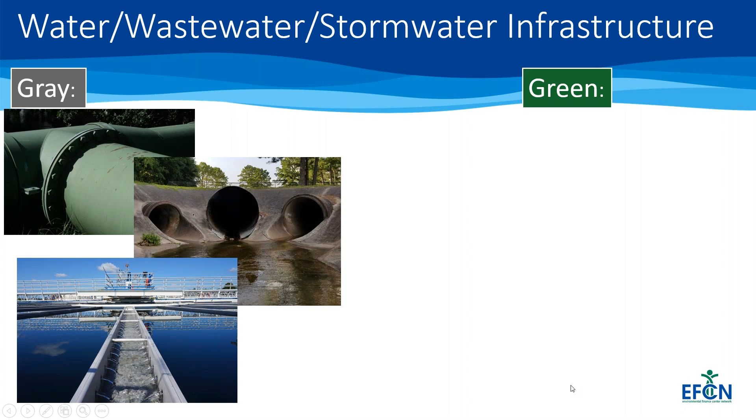So what about the green part? What are we talking about there? There's no official or universally agreed upon definition of green infrastructure, but for this series, I'll break it down this way: green infrastructure is water, wastewater, and stormwater infrastructure that integrates natural systems like plant growth, the water cycle, and soil filtration as part of its function, beyond just the bacterial and biochemical processes usually associated with wastewater treatment plants. This could look like a vegetated swale, a rain garden, or a wetland, either constructed or naturally occurring.

From these pictures, it might seem like I'm creating a dichotomy of green versus gray, but actually in most cases we advocate using both types of infrastructure, and we do need them to work together well.

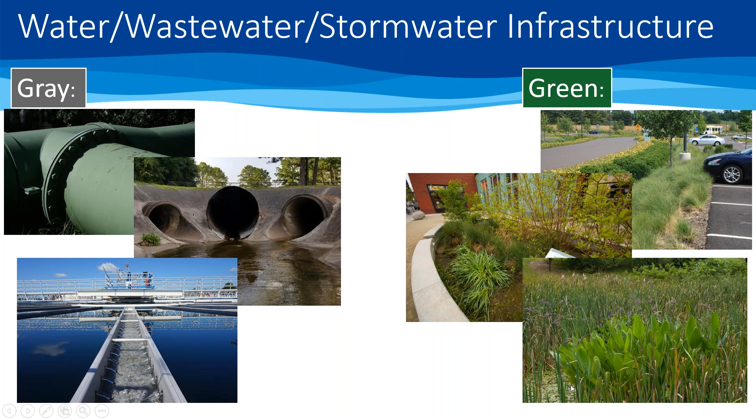Let's look at an example of green and gray infrastructure that share a function but look different on the ground. Here we have concrete sewer pipes whose function is conveyance of stormwater away from roads and buildings. Its green counterpart is an infiltration trench, situated along a parking lot. Added or co-benefits of the infiltration trench could include filtration of water through the soil, allowing plants and fungi in the trench to break down pollutants associated with the adjacent roadway, like heavy metals and oils.

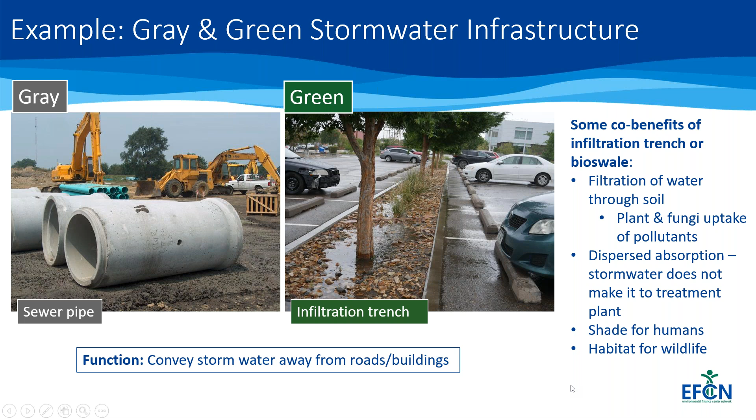This is also a feature the community can enjoy walking along. The plants cool the air and soil, improve air quality, and capture carbon and other airborne particles. If you're still confused about what green infrastructure is and what it looks like at different scales, you can watch the first webinar in our series, called Green Infrastructure 101, which gives a much broader overview and more examples.

So why are we advocating for green infrastructure? It's also called nature-based solutions. A big reason is climate resiliency. Much of our current infrastructure was built with a very different idea of what a 100-year storm might look like. Here in New Mexico, that looks like longer periods of drought followed by deluges of precipitation, far outside historical norms on both aspects. Much of our aging storm sewer infrastructure is not really built to handle those volumes of water.

We're losing a lot of that fresh rainwater as runoff. Green infrastructure at all scales can capture, slow, and filter stormwater right where it falls. This reduces the burden on treatment plants and simultaneously improves water quality by treating that water before it returns to sources we use for drinking, such as rivers, lakes, and groundwater.

There are also co-benefits to green infrastructure. In addition to slowing and filtering rainwater, there's a huge range of co-benefits for humans and wildlife. These co-benefits are wide-ranging. You can start thinking about some of them as you go through today's presentations, but they include shade, habitat, and public open space.

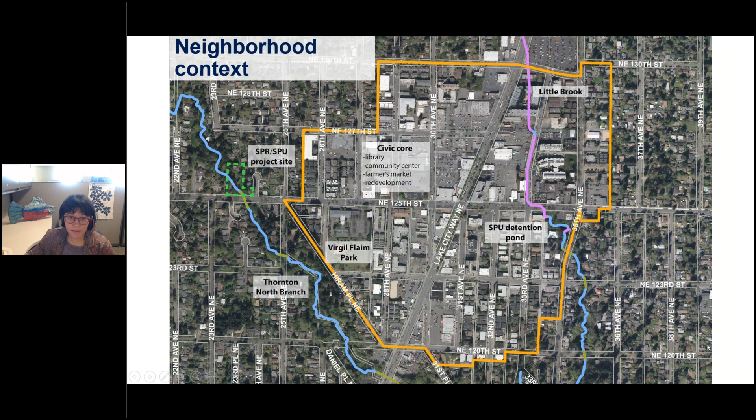So in 2009, Seattle Public Utilities identified some of the best locations along the north branch of Thornton Creek for floodplain reconnection. This is just a sampling of some of the opportunities that we see.

Shannon did a great job of talking through what green stormwater infrastructure examples can look like. In Seattle, we've expanded green stormwater infrastructure to include creek restoration that offers floodplain reconnection. This alleviates flooding and pressures both upstream and downstream, but also improves water quality and natural habitat for salmonid species in particular, but is generally beneficial for ecological purposes.

So we identified this site to be tremendously beneficial within Thornton Creek, and the goal of this work is to continually identify places along the creek where there can be contiguous acquisitions or other ways that we might provide for floodplain reconnection, because we know that enhancing our creeks and rivers is a cumulative effort that requires work along the entire branch of the creek.

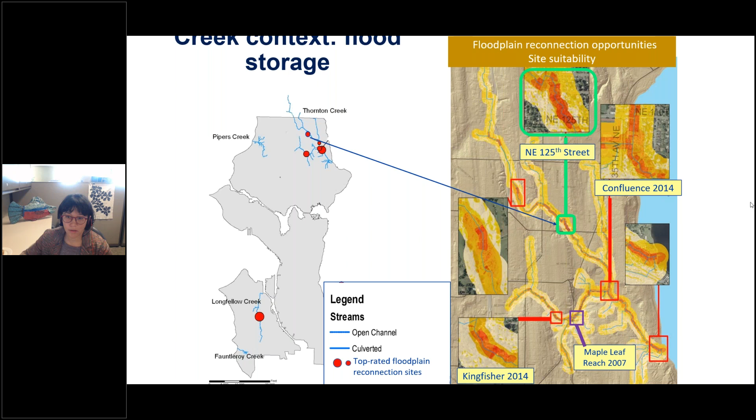But our third sort of key partner in all of this is Mid-Sound Fisheries Enhancement Group, and they have been the lead through early planning and into 60% design. It's been tremendously helpful to have a community-based organization, particularly in this neighborhood where there may be some distrust of government. They also bring expertise that the city just doesn't have around grant acquisitions, around particular types of engagement, and we really benefited from their leadership.

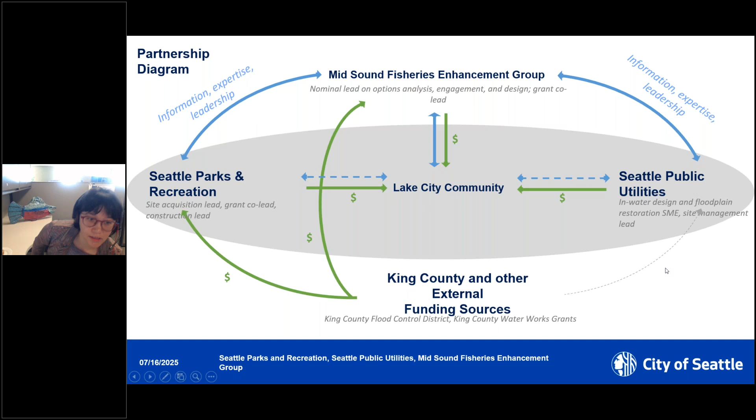So the 3-way partnership that we have has brought a lot of complexity into our coordination, but it really has some strengths. And one of those is Mid-Sound's excellent relationship building and community engagement skills. Engagement was meant to be fun and to meet people where they're at. We developed multilingual materials and worked at in-person events at community centers, farmers markets, and other neighborhood festivals that really were meant to leverage connection, but not necessarily dictate how the community might come to us. Mid-Sound led that effort tremendously well.

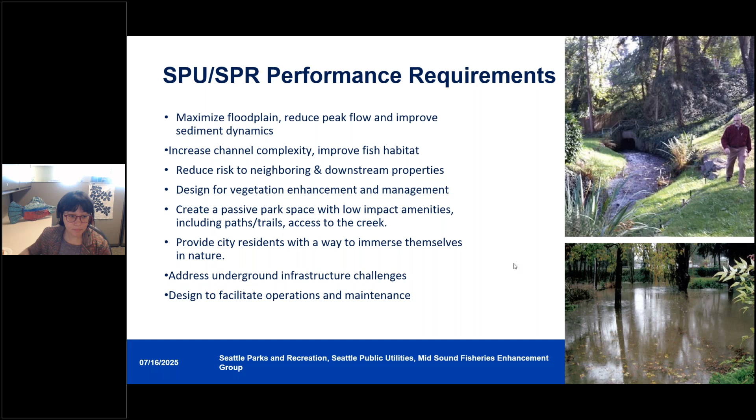On the 30% design, we did design a loop trail. A lot of that area would have been detrimental to the actual restoration of the floodplain. So today we have a little bit of a different design where it's more of a gathering area in the back that allows for people to kind of be mobile in that area and are able to really experience the extent of the park, but might not increase the hardscaping and in particular the construction on steep slopes on the southeastern portion of the site. We also increased the ability for mobility, ADA access down to the sitting gathering area, which was not previously available. That is something that we're really trying to focus on with this park.

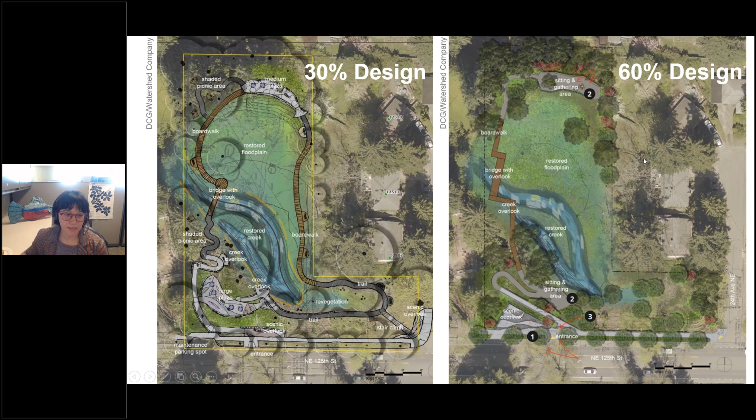So I just wanted to also highlight, this is our 60% plans again, but this is through the lens of art interventions. One tremendous benefit of our partnership is that we have access to the city's 1% for the Arts program, which is typically based off of the capital portfolio budget of a particular department. The Utilities capital portfolio budget is much larger than the Parks and Recreation department's, which means this park will get a lot of art funding through that program, when typically parks might not have as much. So this is another win for how we partner and stretch public dollars to benefit communities.

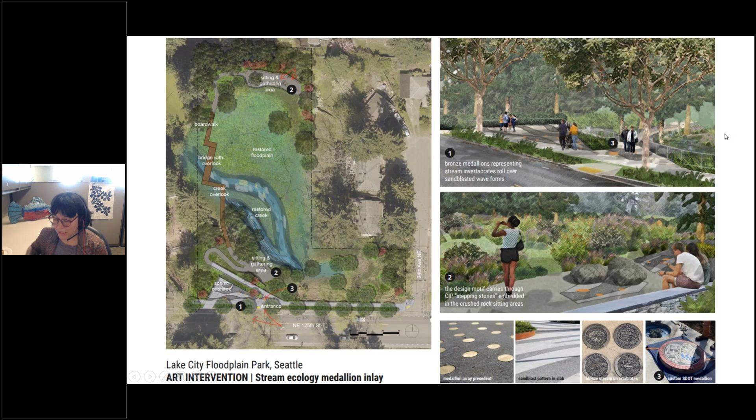Typically we would split costs based off types of assets, line by line, what we call below or above the ordinary high water mark for creeks. But both departments said, you know what, this is going to be a beneficial project for both of us, and more importantly for everybody in this community and for the city in general. So let's just think about this as us partnering together and splitting things down the middle.

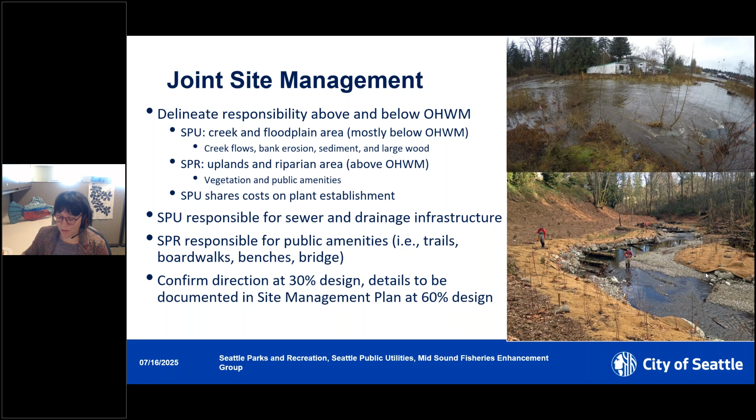My last slide is on lessons learned. I don't know if I have time for that or if we should move on, and maybe if there's time at the end.

Yeah, that sounds okay. Also just want to reiterate that we'll have these slides available to everyone, so if you read the slide and have questions about it, feel free to reach out to me or our speakers about any of those questions. You can also put it in the Q&A as well. And I think if you go one more slide, my contact information is here, so please feel free to reach out to me at any time. I'm happy to share more about this project.

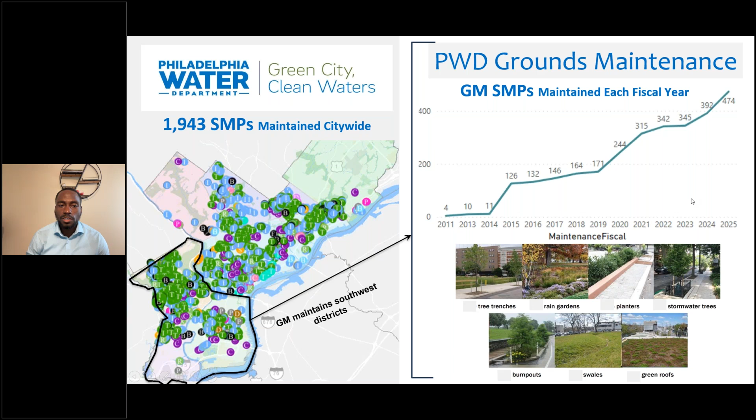The overview of the Green Stormwater Operations Unit: we started off with the name GSI Maintenance Group, created in FY 2010 under a unit called the Office of Watersheds. The following few months, we took on 21 pilot sites, but not internally, through contractors. 100% of our maintenance was done through contractors, and some subsurface features were limited to PWD and contracted out as well. In 2015, we decided to build our first internal maintenance team dedicated to the maintenance of these systems, which included myself and two other individuals who transitioned through a workforce development program called PowerCorps PHL.

In 2017, GSIMN moved into PWD Operations. It just made so much more sense—maintenance had become so much more, and operations made sense.

Operations include technical staff, environmental scientists, environmental engineers, park water technicians, but also the grounds maintenance staff, the boots on the ground. We began to increase support from PowerCorps PHL, the workforce development program, and also continued to contract some of the labor for surface and subsurface features. Additional support was given through our Soak It Up adoption program for community members engaged in some of the work. So currently we have 2,000 stormwater management practices throughout Philadelphia, and we are continuing to fulfill our operations and maintenance requirements.

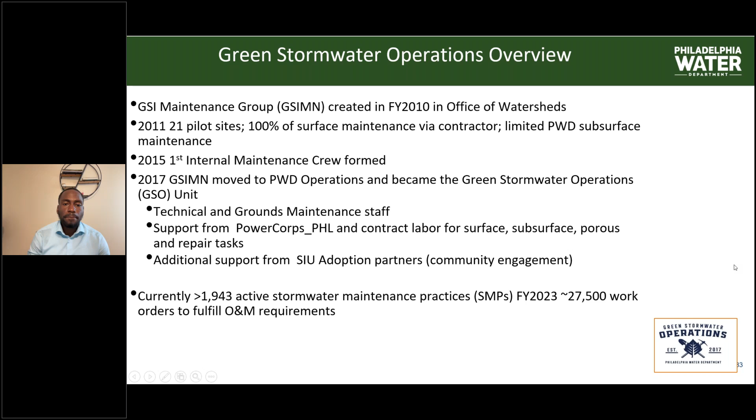The power of partnerships was very important in the early stages of building this team. PowerCorps PHL is a workforce development program under AmeriCorps, where individuals aged 18 to 32 who may face challenges getting into the workforce develop skill sets that make them more attractive to companies and organizations. We began this partnership to establish our maintenance program, partnering with PowerCorps to begin basic maintenance, like aesthetic maintenance and things of that nature.

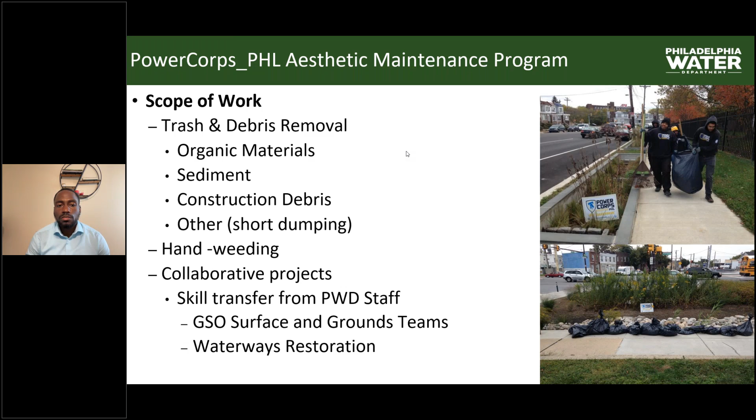Our pipeline from apprentice to permanent civil servant started with myself. I was one of the first apprentices to come through the PowerCorps program and into Philadelphia's apprenticeship program. It was the early stages of this program, and we continued to build it out, increasing trainings and things staff needed to transition.

The apprenticeship program is 12 to 24 months. Staff are temporary employees, and during that time they are paired with a mentor within the unit. They shadow that mentor, who is part of their performance plan and evaluation process. We've been very successful with our apprenticeship program—apprentices have been the building blocks of our team.

Once completing the program, apprentices have the skill sets and qualifications to test for civil service positions. One thing I want to highlight is that under the Mayor Nutter administration, AmeriCorps points were added for those who completed AmeriCorps programs, giving them extra leverage in testing for civil service status.

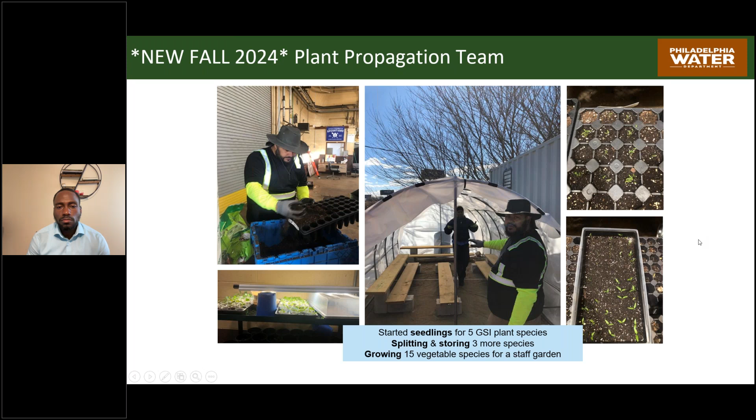For the future of our trainings, I have facilitated a lot of our internal trainings, and so have the supervisors that report to me. But to be more efficient, what we are working on now is trying to transition into an LMS, a learning management system, where it's more flexible for staff to hop online and take a training. It's easier to track how folks are doing, whether they're understanding the information, and whether they need more training. This is the future.

This is an example of a plant ID quiz. We have plenty of modules that we're working on, but for the future, we're looking for more efficiency in keeping folks trained up.

This is an example of our career ladder within my team. We start off with the Power Corps volunteers. That partnership helps us pull from the pool of talent from Power Corps and some other workforce development programs. When they come on as apprentices, we have been successful with hiring 30 total apprentices, 23 of them from Power Corps PHL.

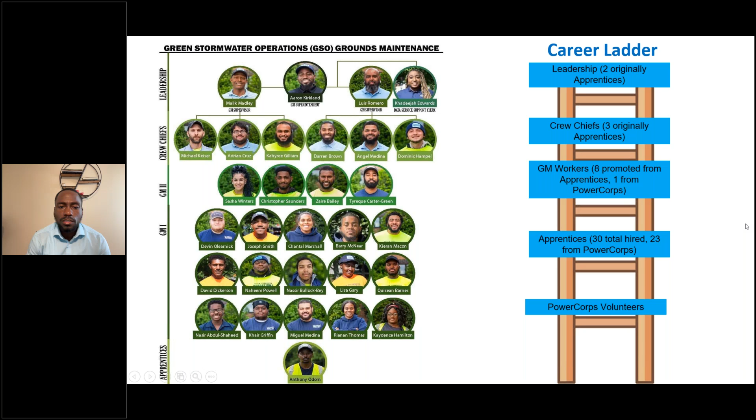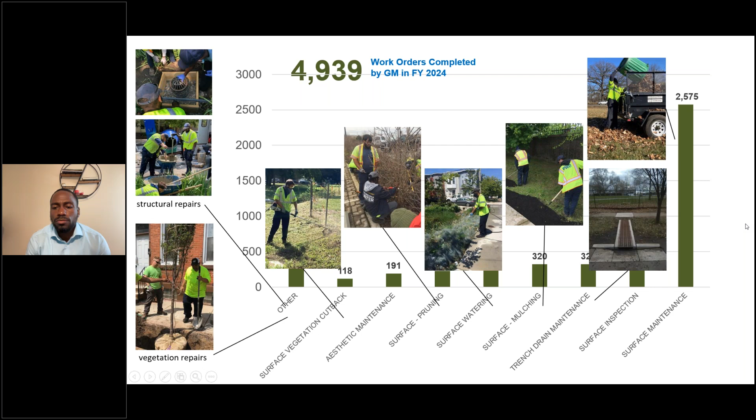The work, it's important that we understand data. We record data. All our crew chiefs are responsible for tracking costs of labor and equipment for each site visit through our asset management system, CityWorks. This allows us to see if the things we're implementing are working. It also helps us make the case that investing internally is best when you think of cost efficiency and long-term sustainability of our maintenance efforts. As of FY 2024, we have completed 5,000 work orders, and those work orders vary from vegetation cutbacks to watering, mulching, and surface maintenance.

Our end result was creating green industry professionals through our partnership with Power Corps PHL and other workforce development groups, and we have done so. Most of our leadership structure, maybe 60%, have come through Power Corps or a similar program. Starting from the ground up, you really get passion when you invest in people from the community to do the work in that community. We have been very successful with our model.

Next slide please. The way I would say it is you need to be intentional about building out a team dedicated to maintenance. Our apprenticeship program has been the building blocks of our staff. We are now at 40% of all stormwater management practices maintained in-house.

Power Corps was the workforce engine that got everything started as far as partnerships. We have 30 plus staff that have come through partnerships, and the apprenticeship model provides real testimony and proof that if you invest in folks early, long term, and can retain talent, you have a well-oiled team. For the future, as we continue to grow in scope of work and systems coming online, our long-term success will solely depend on deepening community and hiring with our partners.

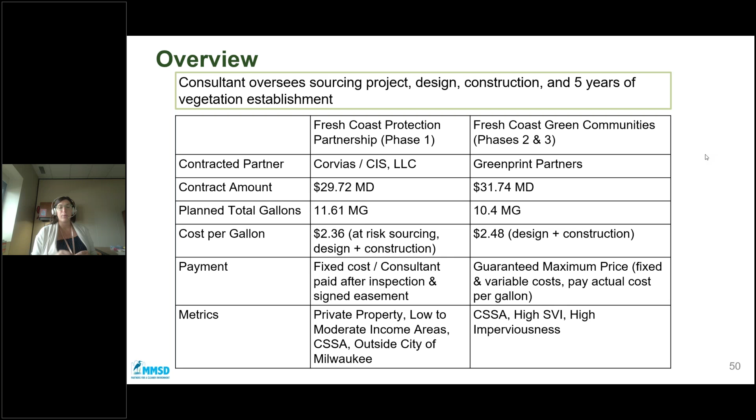We pay the actual cost per gallon, so again it's not that fixed cost per gallon. The key main metrics for these two contracts are the combined sewer service area, a high social vulnerability index, which means areas known to have severe flooding issues, economic issues, air quality issues, and things like that, and then areas with high imperviousness, a lot of hard surface.

I think I'm going to skip the next two just to get into the finance structure, so we have a little time. You can skip the next one and then one more.

So the fixed price, again, this is the Fresh Coast Protection Partnership Program. Some benefits about a fixed price model are cost certainty—MMSD knows exactly what we're going to pay per gallon ahead of time. There's incentivized delivery, so the consultant CIS is only paid once a project is done and certified that a certain amount of gallons have actually been installed. It's a design and build at risk model, so all the transfer of financial and delivery risk goes from MMSD to CIS—they must deliver functional certified GSI before we pay them. And then accountability through certification: independent verification of the performance ensures transparency, quality control, and environmental benefits.

So again, this is whether a project's true cost is $1 or $8—we have a fixed price with them where we only pay $2.36 per gallon.

With Greenprint Partners, the Fresh Coast Green Communities program is a guaranteed maximum price contract structure. At a very high level, one of the contracts is $20 million. If they go over $20 million to hit their goals, we only pay $20 million and they have to pay whatever else it takes to get to those goals. So it really guarantees that we're not going to pay more than that $20 million.

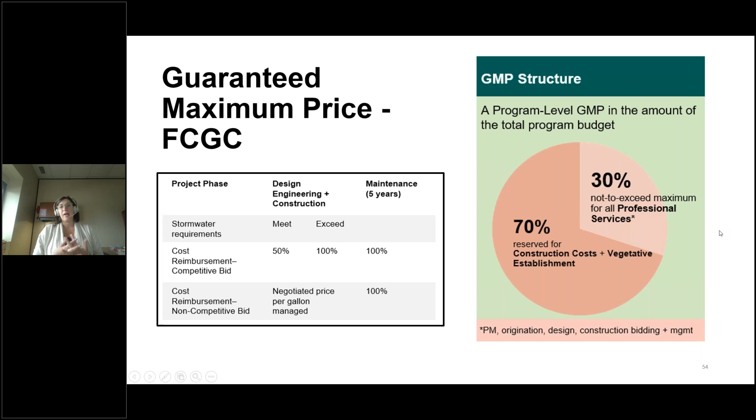So it really is a very collaborative, wonderful partnership for these contracts.

Next slide. The next two slides are just two project examples I wanted to share. The first one is Davidson Park, as in Harley Davidson motorcycles. This project transformed a parking lot into a model of inner city green space. If you look at the circle part of that project, all of those little rectangle tiles are motorcycle parking spots.

This is a really great feature for green space, gatherings, and things like that. CIS financed the green infrastructure up front with the green features you see here of bioswales and native landscaping. We have permeable pavement that captures a little over 230,000 gallons every time it rains. The project is valued at $20 million, so Harley Davidson kicked in a lot of money, and we only paid for the green infrastructure gallons.

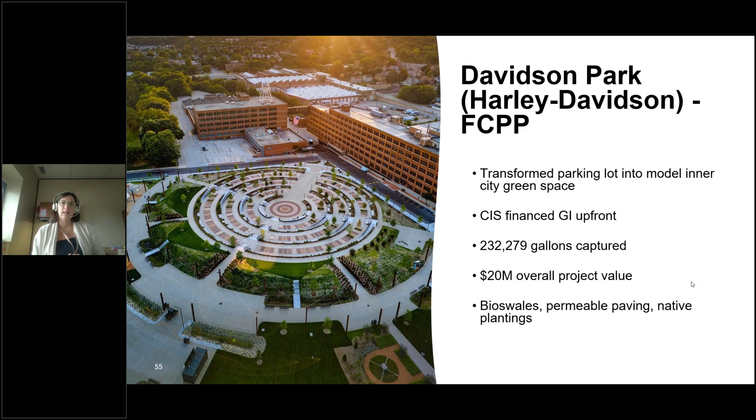Through our Fresh Coast Green Communities program with Greenprint Partners, one project I wanted to highlight is the Orthopaedic Hospital of Wisconsin, shown here during construction. This project had stormwater trees, native plantings, and bioretention basins that captured over 255,000 gallons. It had a high SVI of 0.61 out of 1, and it hit our high impervious area target. We try to have an imperviousness over 40%, and this is located in our separate sewer area, not our combined system.

The construction start date was last July of 2024, and it was completed this March. The total project cost was $544,000, at $2.13 a gallon. Again, that shows how we paid the true cost at $2.13, compared to the previous project where we paid $2.36. So with this project, we're bidding it out, getting the true costs, and seeing what we are paying for. With that, next slide.